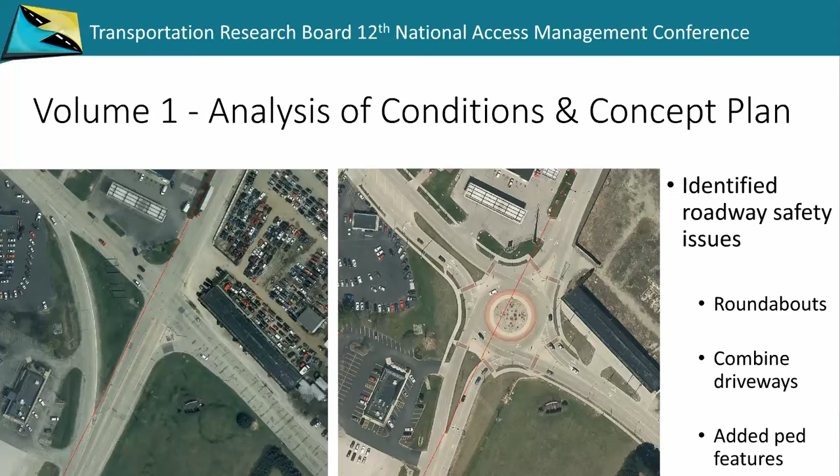And of course here too, my last point was adding pedestrian features. As you can see, the roundabout now addresses all 4 approaches where pedestrians can cross. We connected and extended this down into the Velp Avenue corridor where we didn't have pedestrian features before. And this was pretty much just a pre-timed signal at the time.

Again, looking at the existing conditions, our downtown has a number of one-way pair systems. The one I've identified here actually still remains today, but we did have Cherry and Pine Streets in our downtown here that were one-way pairs, and we actually converted those into two-way streets. The reason I wanted to bring this up is that although this was recommended in volume 1 for changing that up, we have some constraints within the city, that being these access ramps from the Mason Street ramp.

This is our Donald A. Tilleman Bridge or Mason Street Bridge. This is our Walnut Street Bridge, and this is our Nitschke Bridge or Main Street Bridge. So the 3 crossings that we have at the Fox River in the city. Now the issue is, as you can see here, this is actually an on-ramp to this, and this is probably our most heavily used arterial in the city. And then here's also an off-ramp.

So we had considered going two-way on this, but we have a lot of design constraints here, and I think our consideration is probably going to increase once this bridge actually gets replaced. And I know that that's on our radar at this point in time for replacing that bridge. There's been deck replacements and things, but its serviceable life is certainly upon us soon.

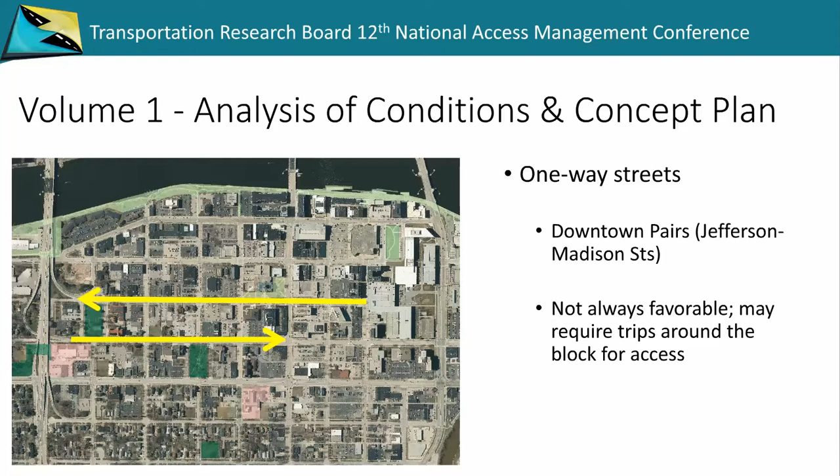Another thing that was identified was turn lanes and bays. They identified that we do pretty good relative to left turn lanes, and I think we continue to do that. Right turn lanes, that's a whole other issue. We tried to, but we're very right-of-way constrained, which I think you can find in a lot of downtowns, that you just cannot add in those right turn lanes because you just don't have the right-of-way.

Frontage roads, we've inherited some of this. This is a connecting highway. It used to be all under DOT jurisdiction, but this frontage road system along our West Mason Street corridor from I-41 to the West City limits has been a large challenge for us. This happens to be the intersection of Packerland Drive, which is a county highway, and West Mason Street.

And these frontage roads have continually been a problem, and I know that we've joked sometimes with some of the DOT folks that we think our best thing to do here is just to put a whole grade separated interchange, but we know that that won't happen. They don't usually think it's funny either when we bring that up.

But during the I-41 construction, what we ended up doing here, because we had crash problems, is we actually limited access and created temporary barriers. So we just put jersey barriers there, and safety was certainly improved. Some of the businesses didn't like it, but they knew it was temporary.

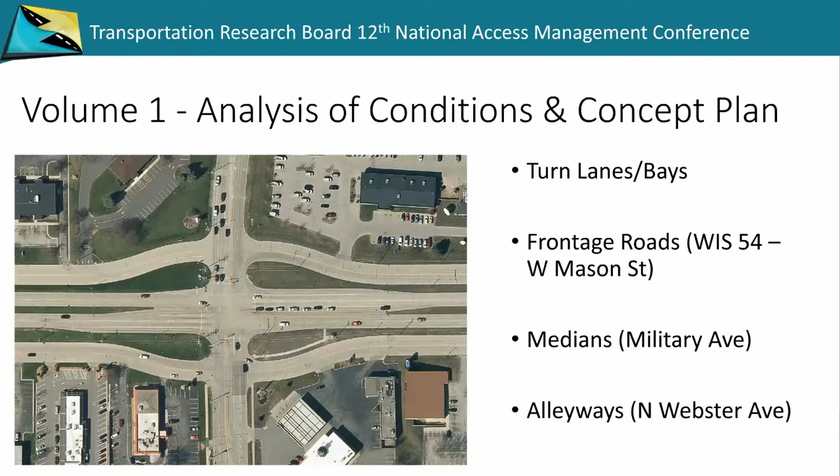Alleyways, I'll actually get more into that on some future slides here. Military Avenue, we reconstructed Military Avenue in 2010. So the design process was very intensive when it came down to the access management portion. Here's the old Military Avenue. You can see Leo Street here, this crosswalk. This actually was a signalized intersection.

This is Shawano Avenue, a connecting highway that goes up to 41. And so you have 2 close signals. This one really was not warranted. We did a warrant evaluation on it, knew it was not needed. And then we also had transit, had bus stops along here.

So what we ended up doing was we created a driveway here for these 2 developments. This is a restaurant, this is a jeweler. We combined 2 accesses over here. Well, it's really just widening them out. So turn bays here, which is a little bit more realistic to what the traffic demand was for the intersection over here.

Plus, we extended the median through Leo Street, which we did get a little bit of negative feedback on in the design of this, but a lot of the people were actually really crossing here, so we enhanced the crosswalks at this intersection, and a lot of the destinations too are west of here.

But we actually took a safety issue, and really it's gone away now, because we used to have all sorts of things with the traffic signals, with the 3M optical heads on there, because people were looking at this signal, thinking it was this one, and vice versa. So we had a lot of safety issues at this intersection, so it was a good idea that we got rid of that.

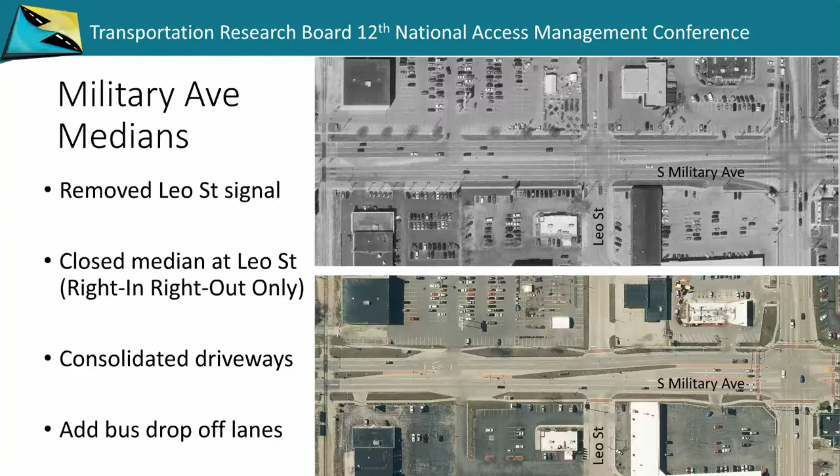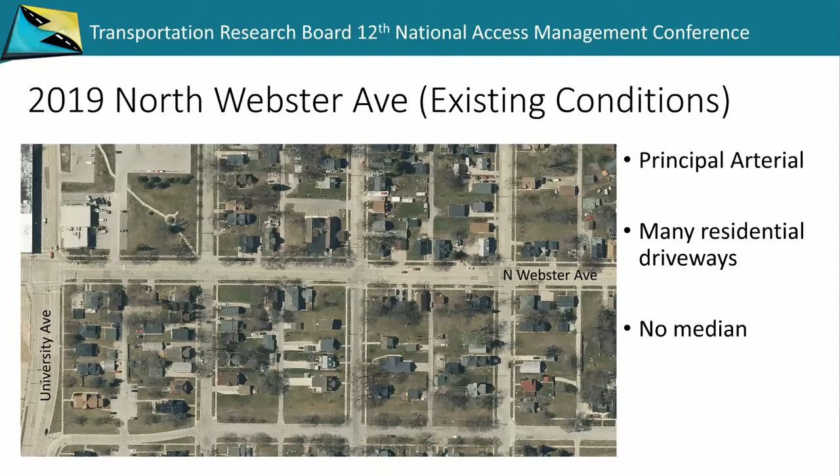North Webster project, as you can see, 2019. We're actually starting the utilities project this year, the roadway construction through DOT next year. So this is actually a principal arterial. I-43 is more this way, and our downtown is to the left of the screen; north is right. So as you can see, for a principal arterial, not a lot of access management. We have an undivided street. We've got all of these cross streets, all of these residential properties along here, driveways, and these are all alleyways coming in. So just a lot of conflict points along this primary corridor that we needed to resolve.

And when this is built next year, the same segment here is going to look something like this. We're doing intersection improvements over at University. As you can see, we've got a wide median that's going to be installed. Big feature here, which actually led to us acquiring all the properties along the east side of the roadway: we're putting in a multi-use path here.

So as you know, multi-use paths and driveways really aren't a good mix. I know that some of our counterparts in Brown County have found that out closer to the airport. But elimination of those driveways and homes is going to make that a much safer corridor for that multi-use path, plus provides us access control. All of these alleyways are then going to be basically dead-ended here, hammerhead, designed to accommodate the garbage pickup and our public works vehicles.

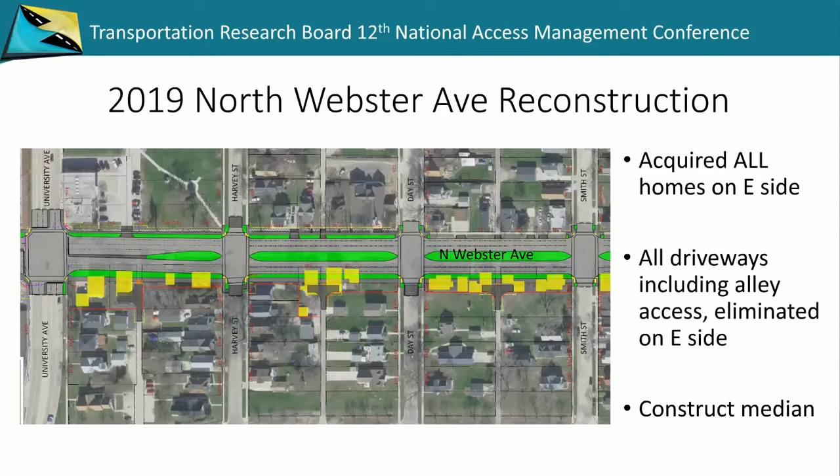Another area is going to be over here. This is 41 again, this is Mason Street. I was talking about Packerland, it's more over this way. This has been a challenging intersection. Again, we've got a frontage road issue. This property here has been of interest to many developers over the years. We've had a TIA completed for the area.

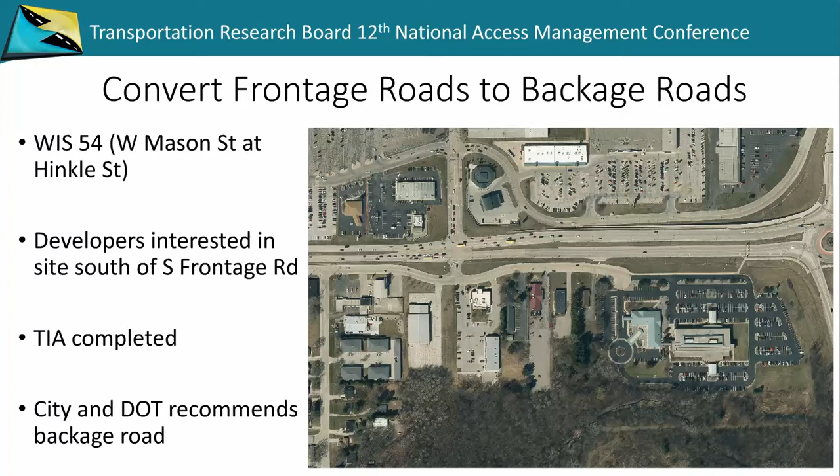Bottom line, what we came up with, folks over at DOT and internally, was that a backage system is the only thing that's really going to solve this whole problem here. This is actually a medical clinic; as you can see, it's a lot of parking, so it's highly used. So a backage system into here is actually what we want to do, and we're going to eventually extend Hinkle Street to the south.

I'm kind of running a little bit low on time, so I'm going to try to wrap this up.

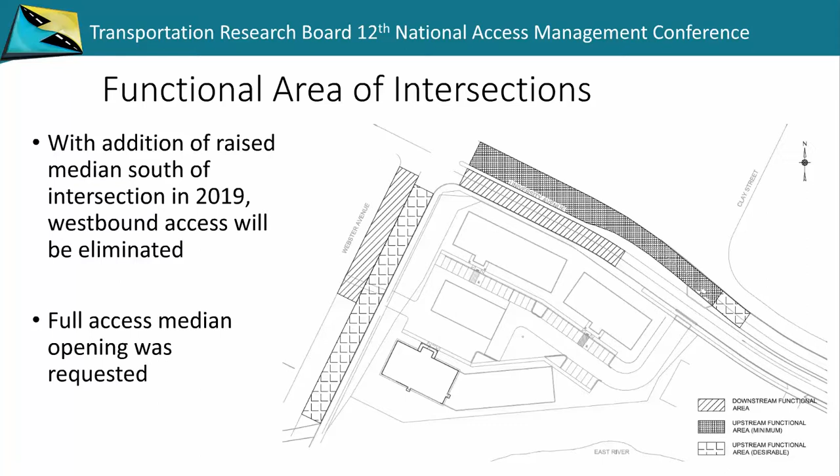So we ended up just going down to the minimum on this, and there was a land swap that was done, and we actually let them have a left in. We're actually still in the final negotiations for this, but legal's putting together land swap documents, and we're going to allow the left turn in on that.

Other methods of access management, not really methods, but things that we've been incorporating and are going to continue to incorporate, especially at the roundabouts for the 41 project, is trees. I don't know how many of you experience issues with jaywalking, but it seems like our community has an issue with it, and our cops don't really like to enforce it because they had one issue about 10 years ago where a famous Packer player got busted for jaywalking, and it got all over the news, so they don't like to enforce pedestrian rules too much.

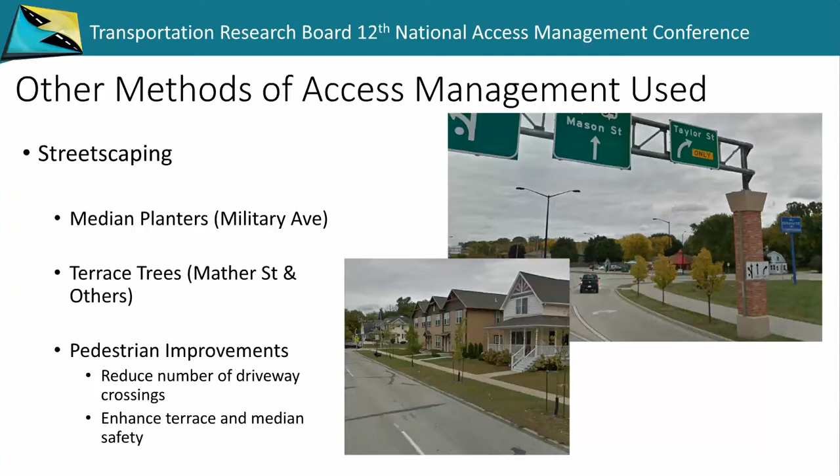So what we've been doing is working with our forestry department and creating a lot of the streetscape with trees and our terraces to give them more of that look, so it discourages the jaywalking, and of course making the pedestrian crossings where they should be.

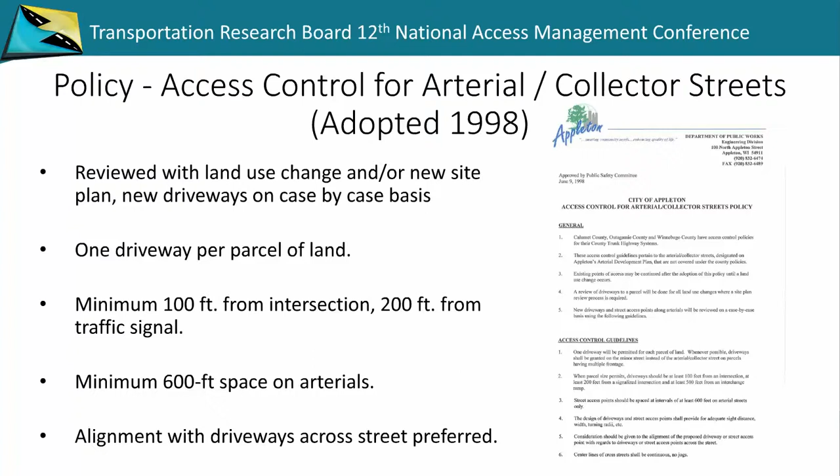So with that, I'll carry it through the applications. The first one is Kwik Trip, which for those not familiar, is a high turnover convenience store with a gas station.

My gut is the developer may not have been honest with the Kwik Trip people, because at some point that seemed like foreign news to them. Even though there's an agreement with the county, because the county actually has access jurisdiction on two roads, there was agreement that those two driveways would be right in, right out. So from a traffic engineer's perspective, you're like, hey, we did our diligence, we feel confident with this, but that isn't how it actually played out.

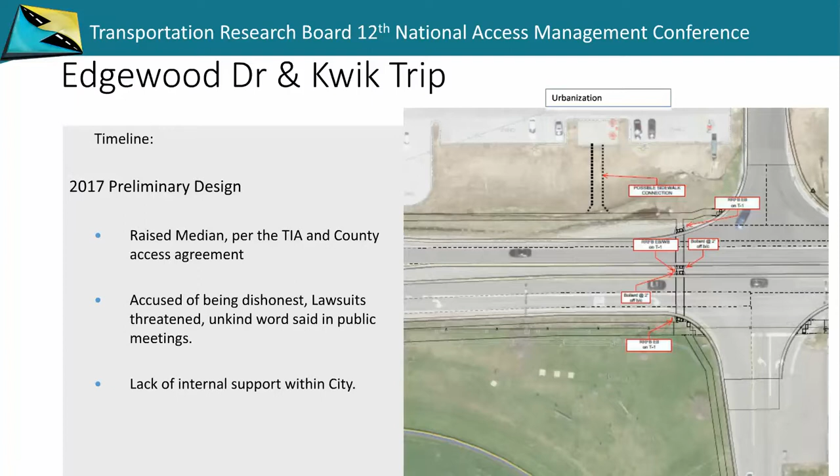You have other locations, case studies where access management did not go well. We just say, hey, this is what it was like, this is what it could be like someday. Will it be there? Don't know. Will it happen in 5 years, 10 years? Can't tell you, it all depends on the pace of development. But in the end, we ended up modifying our design to allow a left in to the development.

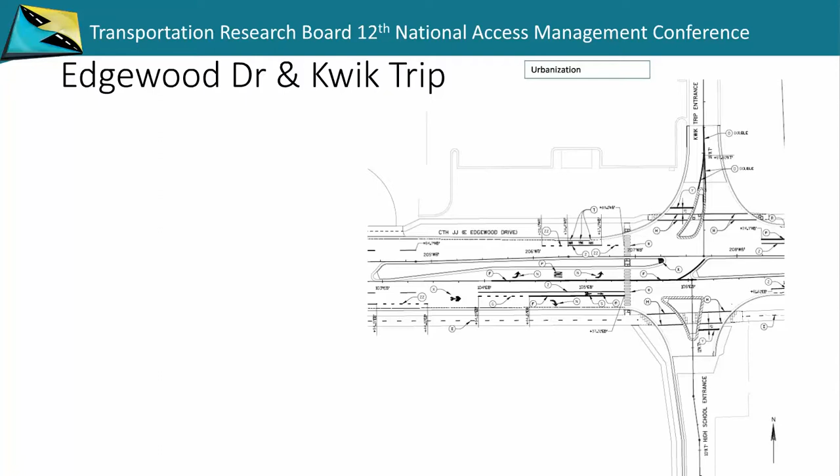One other thing that we did work with the high school on, in cooperation with this project, we did identify some other flow improvements we can make with the access in and out of their parking lot. So this is now only a right-in only. This right out actually got moved probably a couple hundred feet down the road. But in the end, we did allow them to have their left in so they could have their full access. What we obviously designed this then was to try to make it as uncomfortable as possible to make a left out.

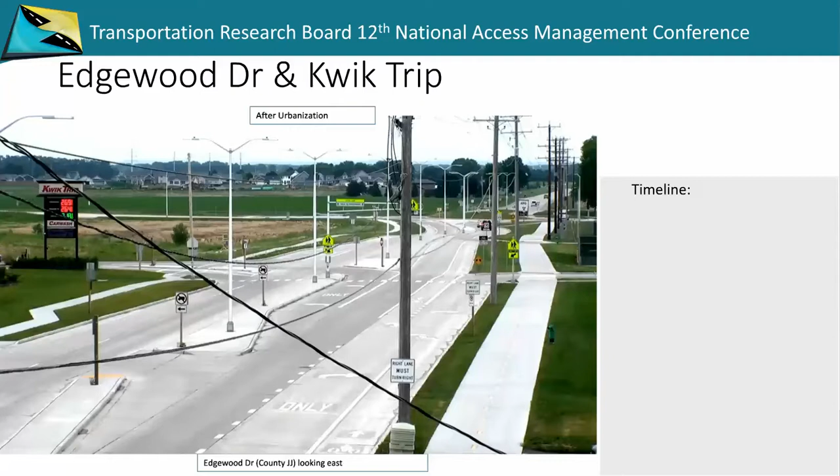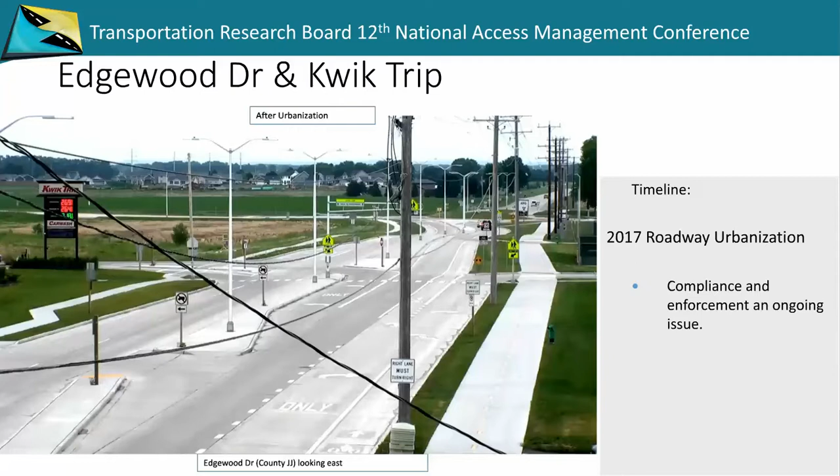But as you'll see from this video here, it's made to be a right in. There you go. So if you follow this path of this vehicle, that was designed to be a right out, and you can see he ignores about 3 signs and still scoots his way through there as a left turn. Now, admittedly, the developer was supposed to build a road to get down to this road we built so he had full access to the intersection. They chose not to. So obviously we didn't have any control of that.

So we're waiting for the pace of development to eventually evolve, and then we'll have some more of those roadway connections that I showed you on the first slide of this experience, and I think that'll help. But in the meantime, obviously, we're going to have compliance and enforcement issues. So I guess that's one of our experiences.

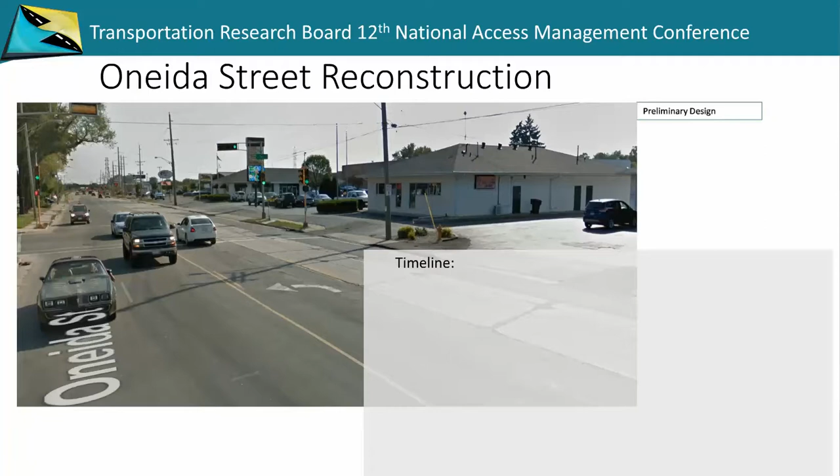So one of our goals with this project, again, trying to apply some common good traffic practice, we did get a consultant on board to help lead the design. You all probably heard the name Pat Hawley. Pat was involved with this project in trying to do an audit of the access management. We felt, from the traffic engineering perspective, we had a good approach to try to publicly acknowledge some of the challenges with access management and try to bring across some good recommendations to make improvements to the corridor.

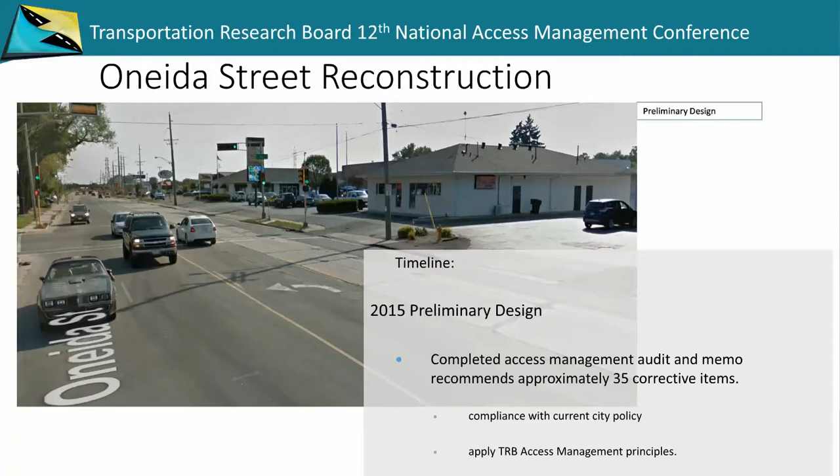So the audit identified, I believe, about 35 improvements, a combination of raised medians and driveway eliminations. We did narrow that down to about 30. Most of the ones we got rid of were the raised medians. So this was an exhibit that was brought forward to the public information meeting. You can see there's a lot of X's on here. So a lot of driveways were being recommended to be removed. I thought once we got through this process, we were in really good shape.

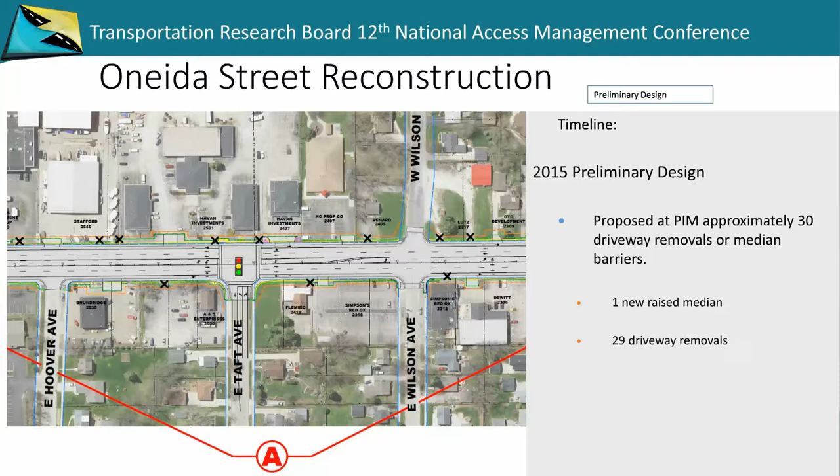But when it came time to finalize the plans, I think that's when we first started realizing, hey, there's more driveways in there now than we had talked about. And I think what happened is, traffic engineers did our thing, but then it got turned over to real estate to acquire right-of-way. And then slowly we started learning that through the right-of-way negotiations, driveways were given back. And in some cases, driveways were even added.

So again, that's the internal city dynamic that you may or may not have to deal with as you're going through access management. Obviously we try to have good dialogue, but sometimes when there aren't project update meetings, next thing you know, you find out that there's a 90% or 100% plan, and you start realizing what's really going on. And at that point, decisions have already been made, signatures have been signed, things like that.

So at the end of the day, there's still going to be some great improvements on here, absolutely. 60%, if we ended up getting 19 of the 30, that's pretty good if you're a baseball player. So we'll take that and we'll move forward. But I think that's where we struggled with, as I noted, we had a lack of internal support. It's not that the traffic engineers are saying it was our way or the highway, but it was a case of there just wasn't any dialogue.

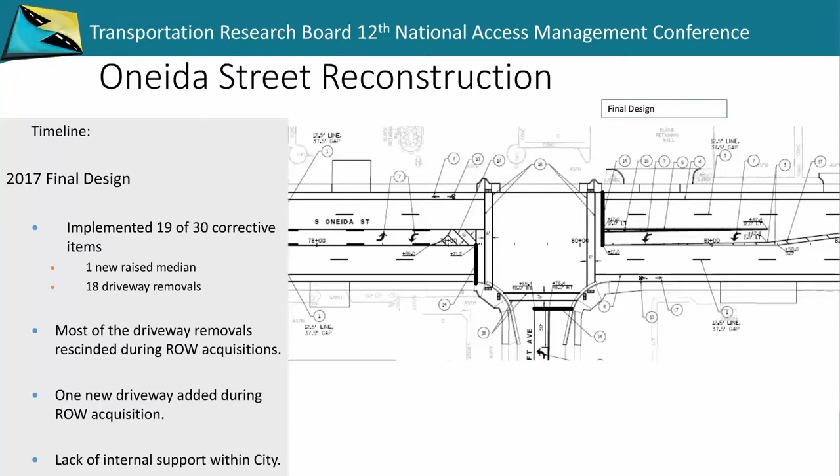Was there any discussion about are some driveways more critical than others? So that's where some of those decisions were made without us that might have been more involved with the access management. So just some of the trials and tribulations of dealing with access. So, that's what I had.